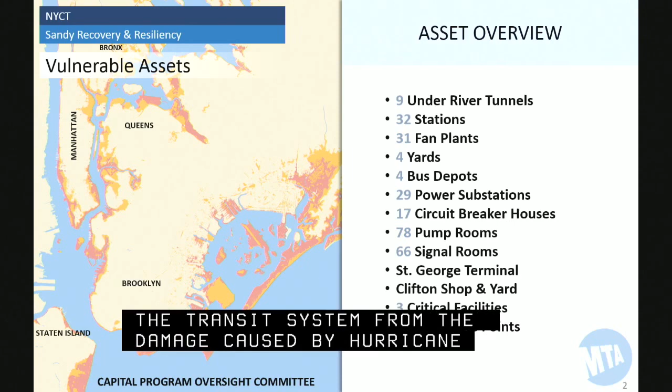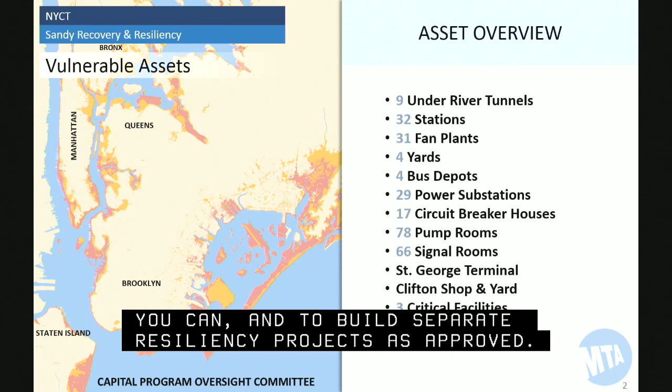This is a substantial effort, but the goal is to recover the system, effect permanent repair, build in resiliency where you can, and build separate resiliency projects as approved. Assisting me in this effort is someone who has just moved on to another position, Alok Saha. He's not here today, but I wanted to acknowledge that he has been the cornerstone of the success of the Sandy program to date.

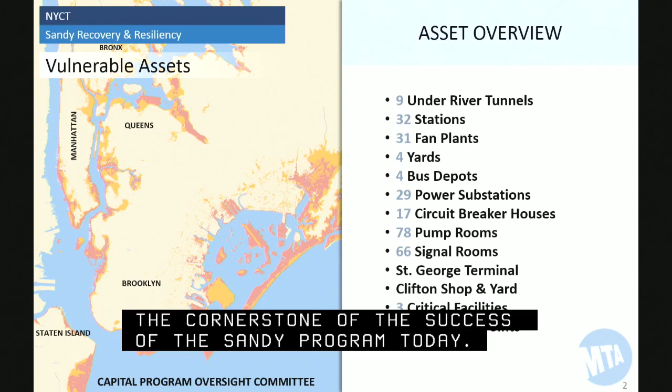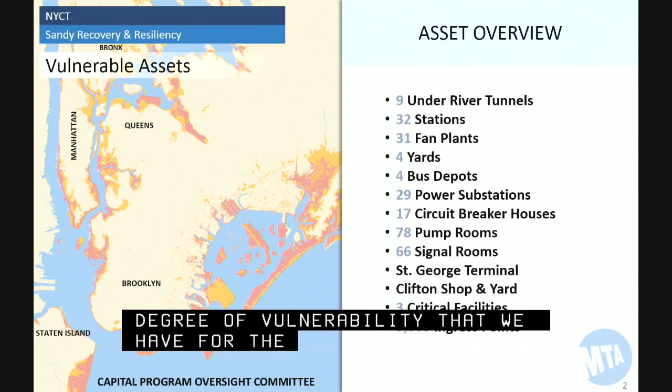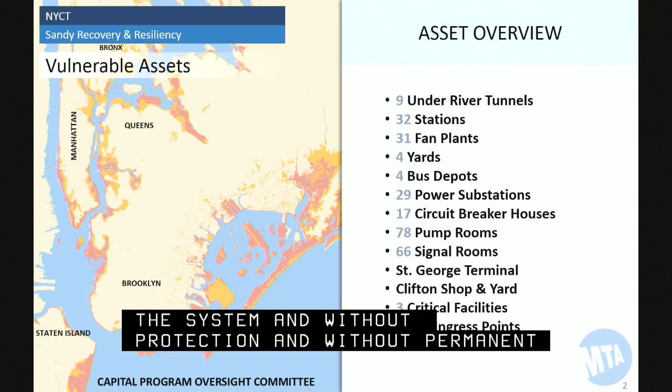The challenge facing transit is significant. A significant part of the transit system, as exemplified here on this map, shows the degree of vulnerability that we have for the assets that support the operations of the railroad. Under-river tunnels, stations, fan plants, circuit breaker houses, substations, all are vulnerable to flooding. All of them are necessary to run the system, and without protection and without permanent repair, the system could be subject to outages.

The goal is to protect the transit system from a Category 2 storm. We are aggressively pursuing that, subject to available dollars, and our needs exceed the dollars available. However, we are working with our funding partners to effect as much repair and resiliency as we can. We have a report that covers 4 categories of work: stations, under-river tunnels, yards, terminals, and shops, as well as resiliency at its core.

Before we get into the 4 aspects of work, I'd like to report on our overall performance to date. Since the inception of this effort, we've awarded $1.5 billion worth of work. So in 2 years, we have awarded $1.5 billion worth of work. We currently have available to us a total funding envelope of some $4.1 billion. So we are well along on the overall funded program for the Sandy Recovery and Resiliency.

I have 2015 commitments of some $250 million of awards and pending awards of some $450 million. Now, the one thing I'm going to take a little engineering liberty on is the Joralemon Tube rehabilitation, which shows up as an award. Actually, we're going to miss it by a couple of days. It's still pending and should be a signed award this week. So I'm going to take a little liberty and say it's awarded.

With regards to planned work, most of what you see on this list is resiliency work, protecting some of the ingress points for water flooding. The non-resiliency work on this list is 148th Street Yard. So $250 million has been awarded so far in 2015, with a balance of $460 million to be awarded as we progress throughout the rest of '15. And into 2016, we have planned $1.5 billion worth of work.

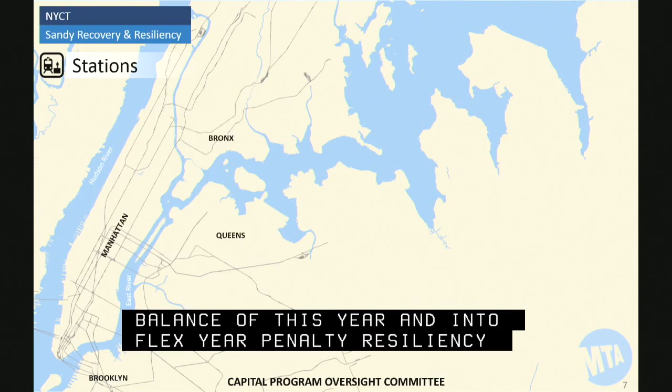With regards to stations, we can move that on. We have 3 stations - 2 in design and 1 awarded. Again, we're going to be talking about South Ferry.

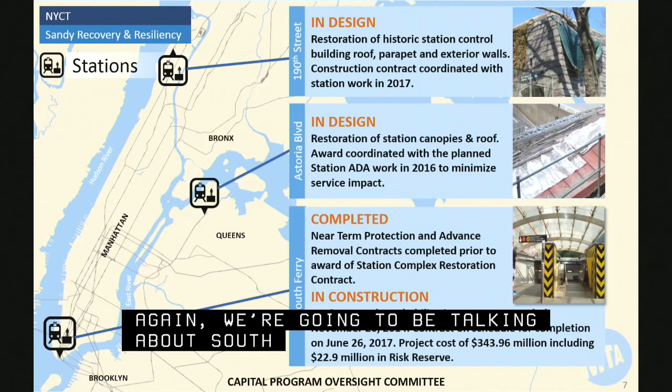That project, a $344 million project, $194 million at bid, was awarded in November of 2014, and it is now July of 2015. The first 6 months of that project were spent on a grout operation, which I'll get into in a minute. But this is a project that's proceeding on schedule, and it will be the full rehabilitation of that station complex.

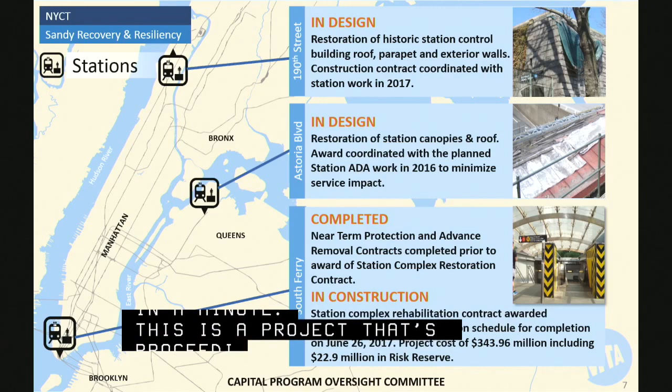The grout operation is a significant operation, and I think I've talked about it at prior CPOC. This is where we are drilling through the structure and performing what is called positive side grouting. When the station opened in 2009, it had a number of persistent leaks.

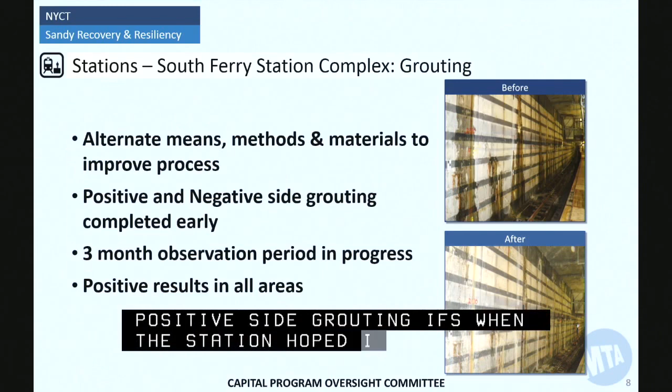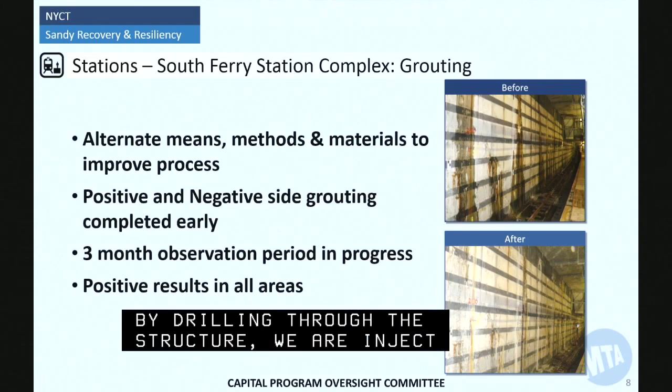The construction that was done at that time had some compromised waterproofing, so that was actually the source of the leaking into the station. By drilling through the structure, we are injecting a new polymer-based grout that travels on the outside of the structure and essentially starts to seal off and reestablish a waterproofing membrane.

Holistically, it is supposed to create a complete membrane. The reality of it is that it creates as much of a membrane as is necessary to stop the water leaking problems. It has been very successful to date.

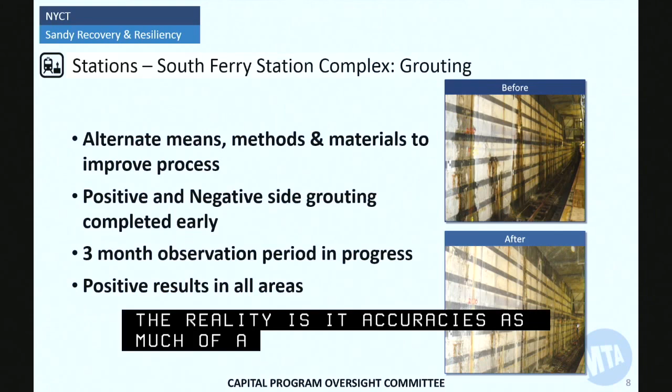The photo in the right-hand corner shows the wall of the station with the finishes removed, and you can see the vertical dark areas where the water has continued to leak into the structure. Then the after photo down below is where the grout has been injected into the structure, and the water leaking has stopped. So we effectively have completed the grout operation.

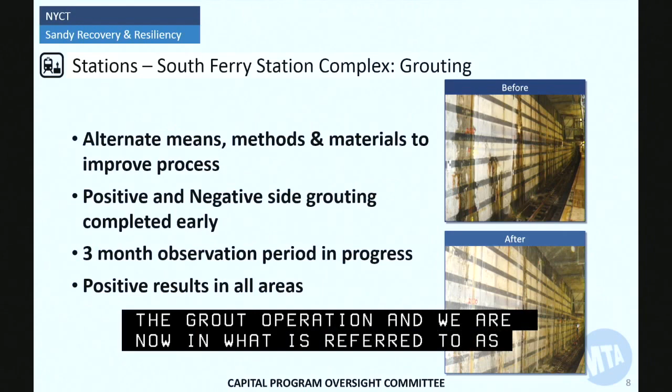We are now in what is referred to as the observation period. This is where we go back in after a couple and make another pass at the grouting if necessary, if a leak continues to persist.

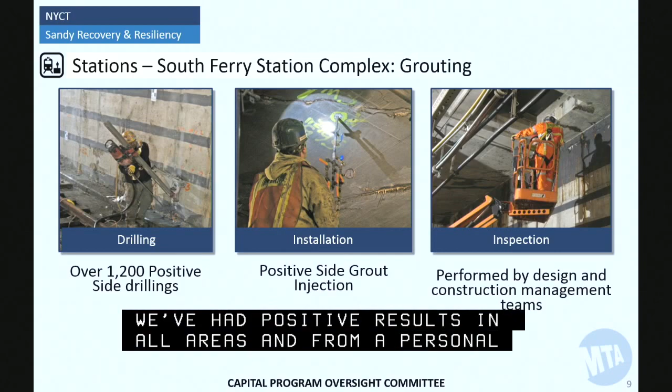We've had positive results in all areas, and from a personal perspective, it's been much more successful than even I had anticipated it would be. I would have been happy with an 80% success rate, and we're well beyond that at this point in time.

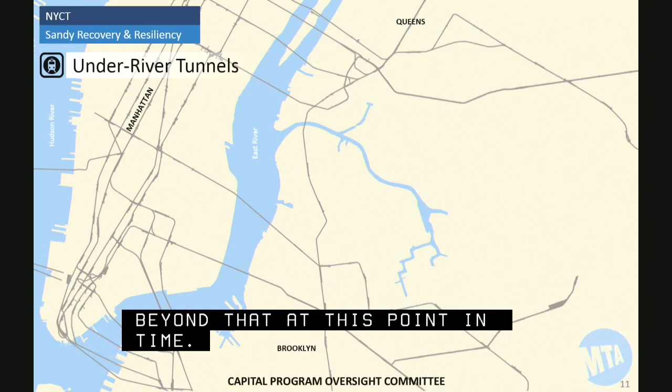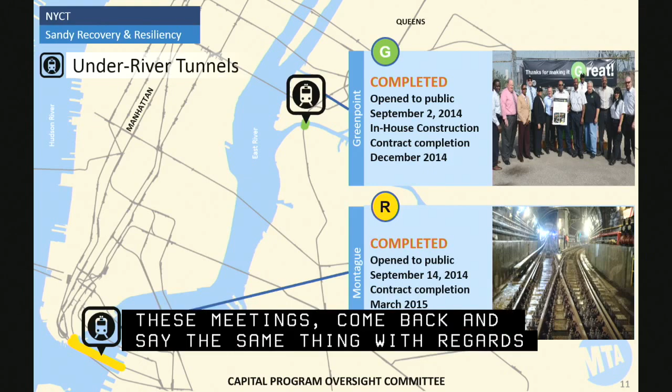We had 9 tunnels damaged in Superstorm Sandy. I'm going to take credit again, because I like to do that at these meetings, and come back and say the same thing with regards to the fact that we completed Greenpoint Tube in September of 2014, work essentially completed by in-house forces, and the overall project was completed in December of 2014.

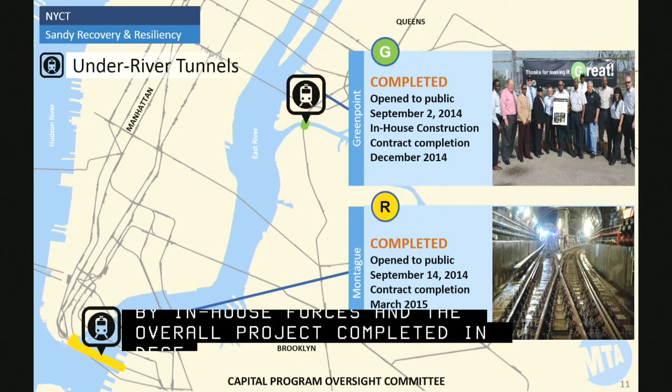Montague, another substantial effort by in-house forces, was completed in September of 2014 with the overall project completion in March of 2015. That sets the stage for our follow-up projects in construction, which is 53rd,

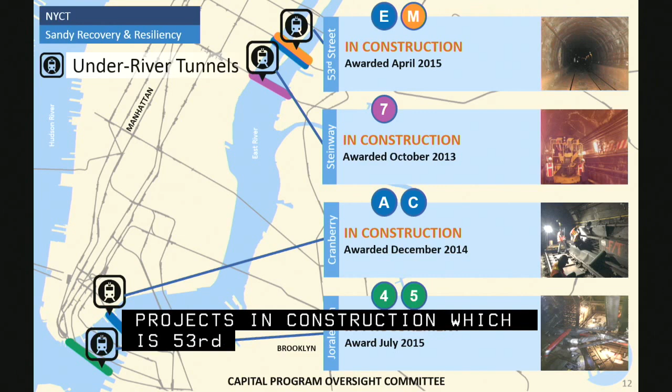Steinway, Cranberry, and Joralemon. All of these projects, again, Joralemon being the one that will be awarded in the next couple of days, will be in construction over the next couple of months.

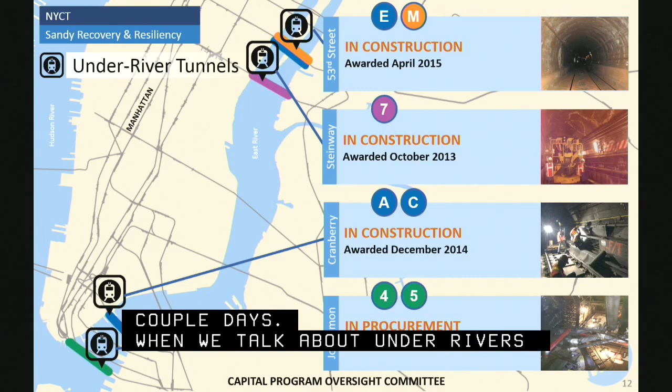Now, when we talk about 4 under-river tubes under construction, there's always a question with regards to service outages. The overall schedule and the outages for these projects is coordinated with the core program, but also then with an eye on the service that we provide.

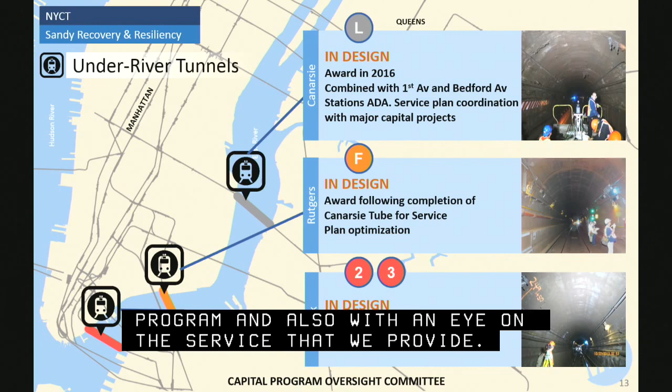Follow-up projects in design are Canarsie, Rutgers, and Clark. These projects will be coming back to the board, CPOC, as we determine the exact time of award and the outages that will be necessary to support.

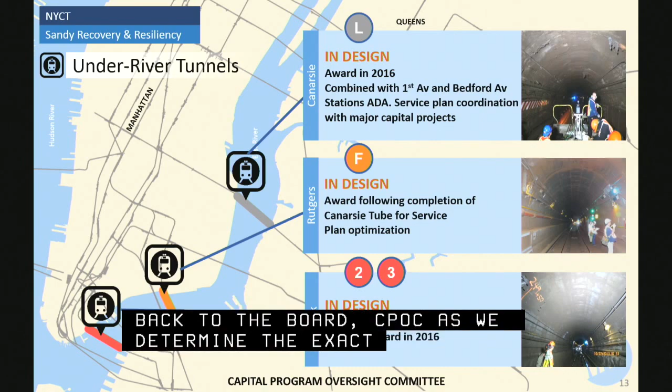Yards, terminals, and shops is one of the categories of work that has an extensive need, and we will see how far the available dollars take us.

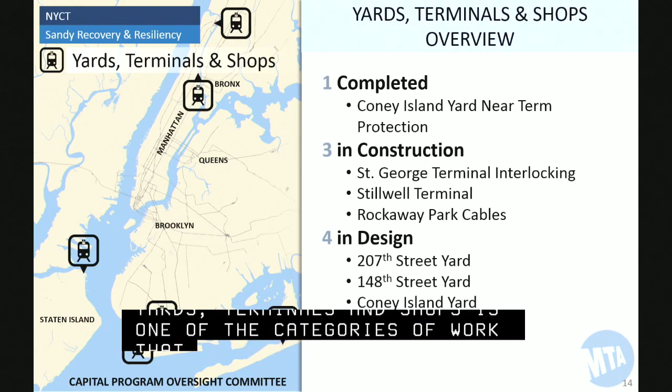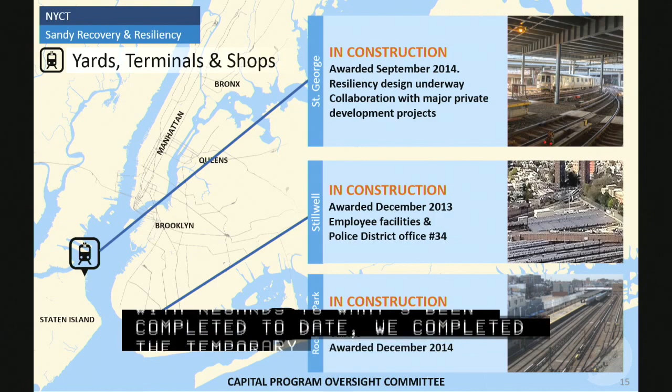With regards to what's been completed to date, we completed the temporary resiliency project out at Coney Island Yard. We have in construction the Stillwell Terminal employee facilities, as well as a cable to deal with the power and communications cables at Rockaway Park Yard.

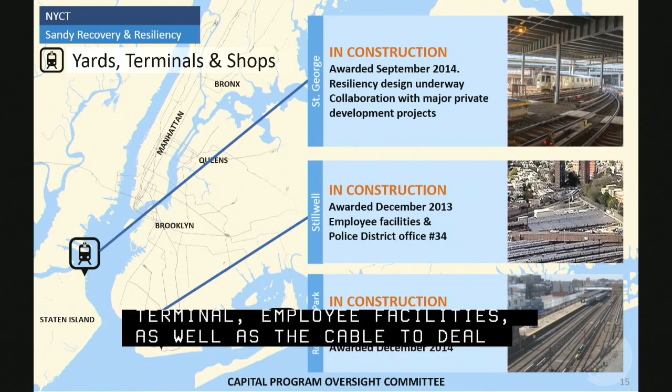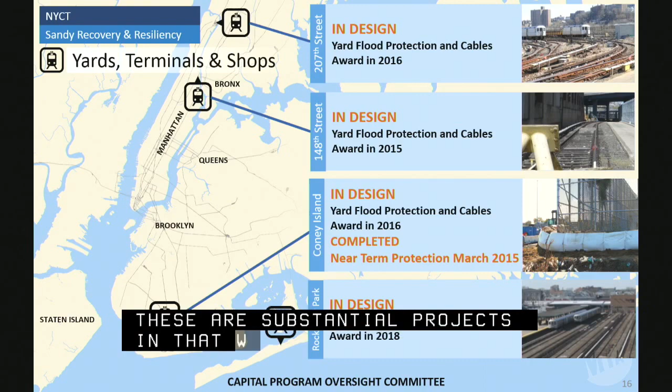In design, though, are 4 major projects: 207th, 148th, Rockaway Park, and Coney Island. These are substantial projects in that we need to build resiliency into the overall facility, while also building in repair to all of the elements that were damaged during Superstorm Sandy.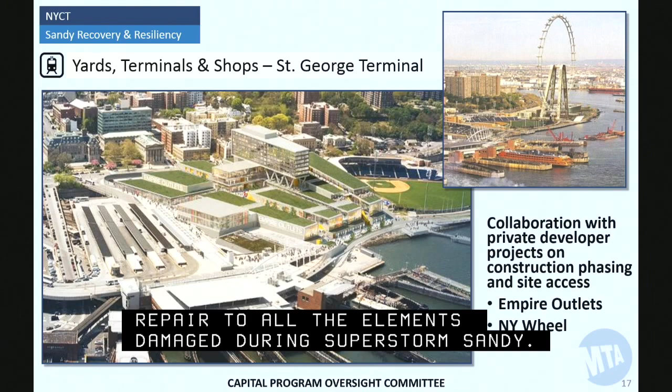The project to focus on in this category of work is the St. George Terminal. This is an artist rendering of what this area will look like shortly. What you see in the middle of the left-hand photo is the bus terminal area.

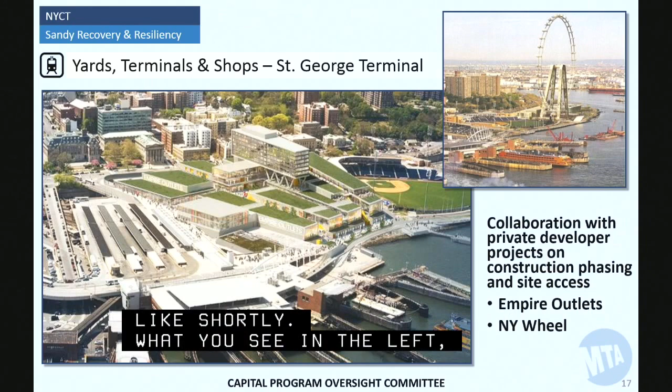Underneath this general area and underneath the green area in the middle is effectively the terminal for the Staten Island Railroad St. George. Off to the right is the ball field, and a little bit further off to the right is the New York Wheel.

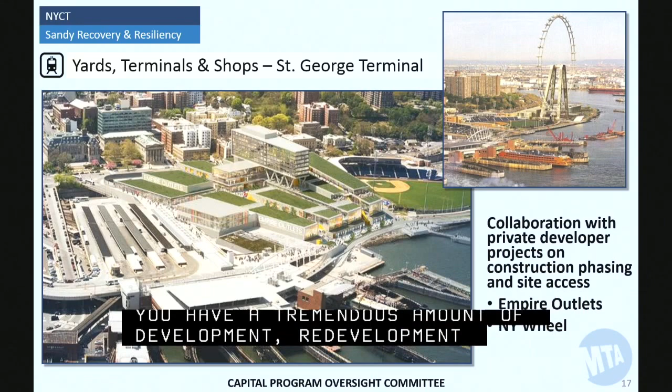You have a tremendous amount of development, redevelopment happening within this very tight site, and so we're advancing this project that was awarded in September 2014 with an overall 30-month duration.

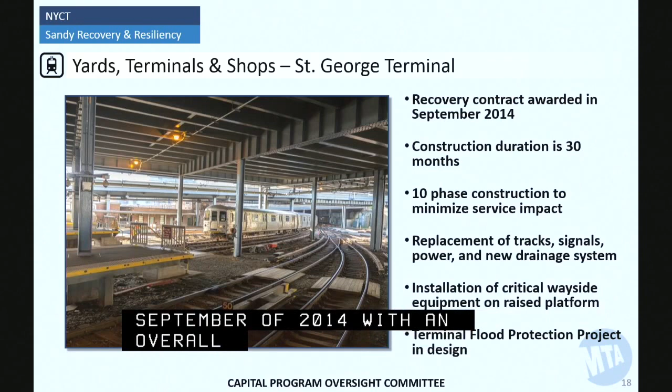It has 10 phases of work, and so what you saw beneath that rendering is essentially the rebuilding of this complete facility, the terminal for Staten Island Railroad at St. George.

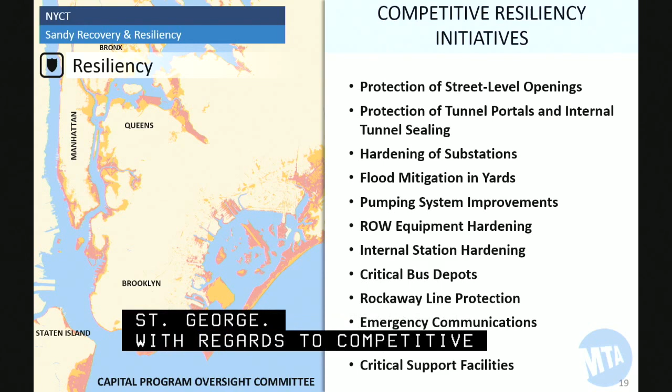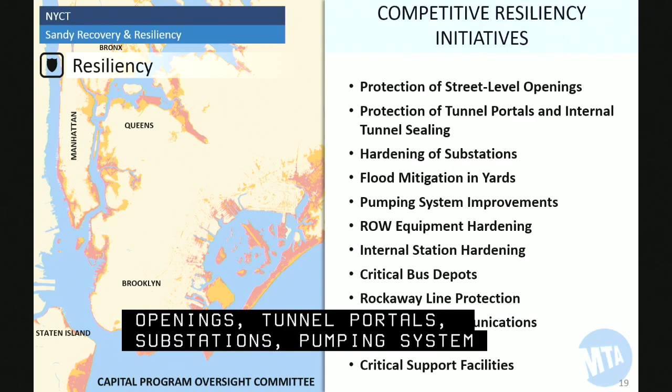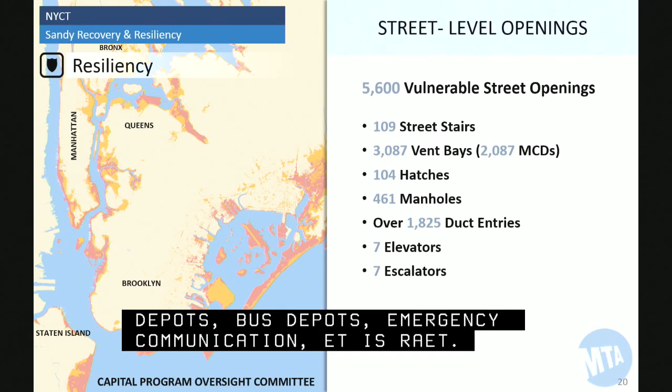Furthermore, with regards to just local resiliency, we have a number of vulnerabilities through street-level openings: 5,600 total street-level openings that are potentially flood ingress points, 109 street stairs, 3,000 vent bays—that's about 10%, a little less than 10% of the total vent bay population—104 hatches, 460 manholes, 7 elevators, 7 escalators.

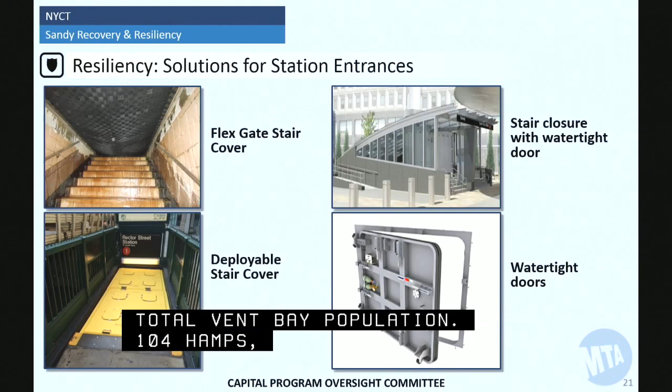To bring about solutions to these, we've had to work with numerous firms to develop site-specific solutions.

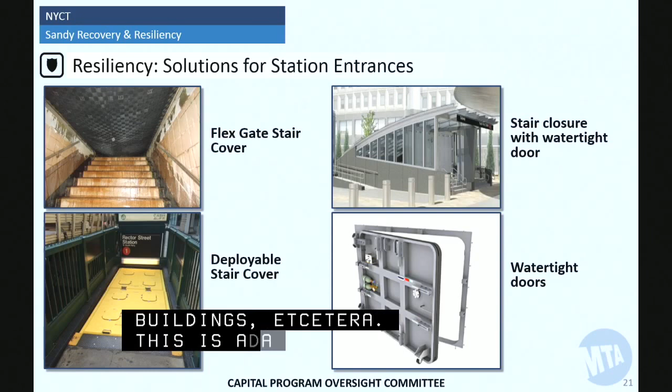On the upper left-hand corner, you actually see a flexible stair gate closure. This is a device developed solely for transit that is now being marketed to other agencies, other firms, other buildings, etc. This is adaptive reuse of space technology that allows us to store on-site, at the entrance to the station, a deployable stair cover that gets pulled out, cinched down, tightened up, and provides full protection of that street-level opening from flooding.

The lower left-hand corner is a different type of hardening—a hardened steel hardening of the staircase. This is something that would have to be deployed to the site from a storage location and installed in place in advance of the storm.

Upper right-hand corner is building in resiliency within the new stair entrance canopy at South Ferry. This is where we're rebuilding the entrance with a hardened, structurally sufficient wall, knee wall, and then a hardened glass glazing. Built within the ceiling of that staircase will be a pull-down stair closure that will allow that stair to be closed should that type of event develop.

We'll also be working with watertight doors.

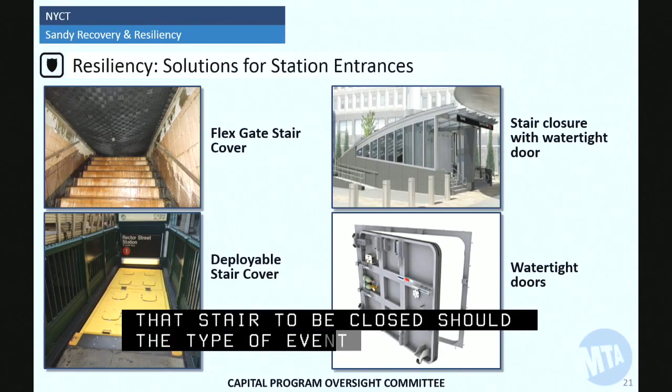Other resiliency solutions that we're utilizing are resiliency stair covers, and in the upper left-hand corner, deployable vent covers. This is just a slightly better version of plywood that would have been used should we have had an event.

Upper right-hand corner, we have numerous hatches—equipment hatches, personnel hatches, emergency exit hatches—that all have to be made watertight. So we've worked with manufacturers to develop them, and now we're starting to install them.

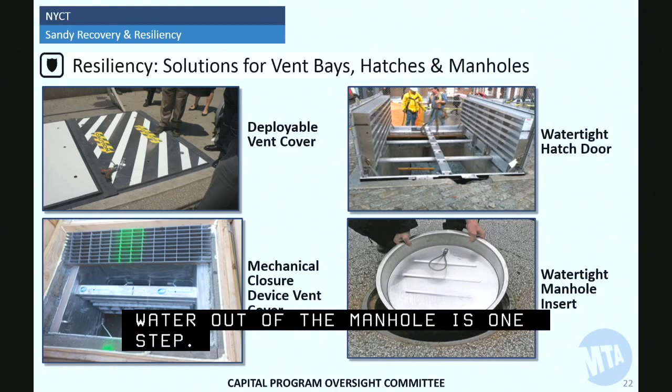Similarly, for manholes, we've developed watertight manhole closure inserts. However, keeping the water out of the manhole is one step. Assuming that insert fails, we also then have to protect the manhole-to-manhole duct bank runs at either end in order to provide a layer of protection against flooding and water infiltration to the system.

With regards to other types of elements, we have elevators that need to have hardened glazing, and we're doing so in the 2 locations that are necessary. We'll be providing a stop log closure at these locations, again, to be deployed in the event of a Sandy-type event.

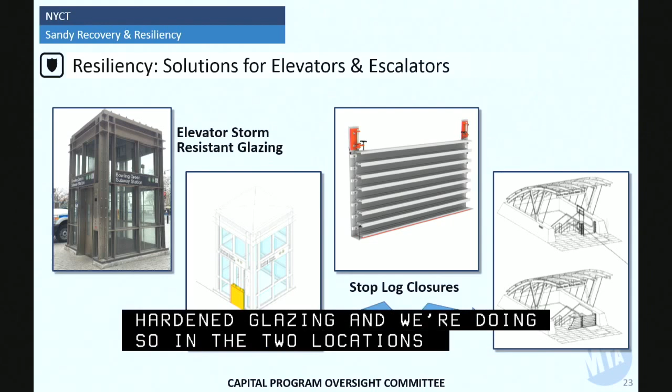And finally, I have a tunnel portal flood protection, a couple of photos to show. In this case, this manufacturer, who works for Department of Defense and NASA, has been working with us to develop a flexible closure device that would be left on site, left at the location, and deployed as necessary should there be a threat of flooding.

In this case, this manufacturer built a full-size mock-up of a tunnel portal. They then deployed, in the middle picture, their flexible closure device. We flooded that to a height of 14 feet and observed a very, very acceptable rate of leakage—very minor relative to what it could be in the event of a storm. What you see in the right-hand photo is the gate rolled up into its open position.

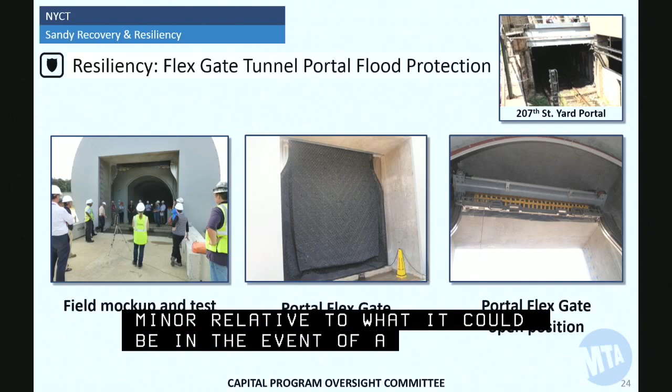So overall, we're continuing to advance the overall Sandy program.

I wanted to thank Fred Smith for his guidance as Senior Vice President. As was announced earlier, or acknowledged earlier, Fred is leaving us. I hate to see him leave because he provided a level of protection that saved me from Sandy-type events. Anyway, thank you all.

I should have said at the front of the meeting, Fred is retiring after a very long career, both at Long Island Railroad and here. How many years, Fred?

I believe it's in his family blood, because I believe your grandfather or father was at the Long Island Railroad. Between Dad and I, we have worked here within the MTA family for 86 out of the last 97 years.

Fred will take a wealth of experience with him, but he's left some able people behind him, and John O'Grady is one. I'd like to thank you. I've worked with Fred three different times, New York City Transit, then over at Long Island Railroad and back when I was back at New York City Transit. So he's had a very long and established career.

Any questions for John?

One of the more aggressive things we need to do is there's still some money out there that needs to be competed for on the resiliency side. Unfortunately I did use the word competitive because we do have to compete for it. It's not going to come to us just because we're the big dog in town. So we need to be able to do that in a very aggressive way and get that money because there's still a lot of work to be done.

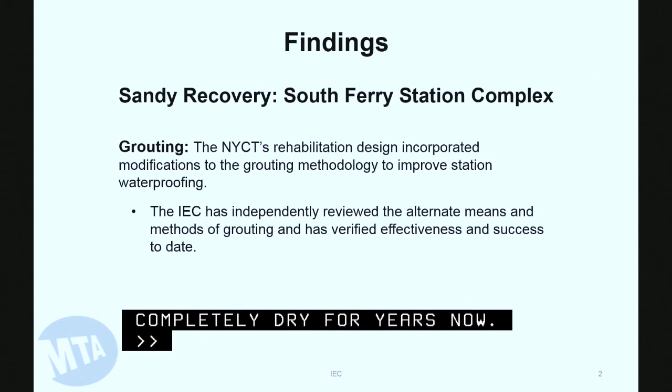Hindsight being 2020, maybe knowing what we know now, if we could go back and do the original design on South Ferry and the construction, we could have used more aggressive methods to capture water and pump it out. Maybe that's a lesson learned going forward, but there was really no way to go back and recapture that once the construction was done.

I can tell you I was surprised. I know John said he was surprised too, but so far it's been very effective, because prior to this it almost used to rain down there at certain times.

There are two sides to this grouting. One is the positive side grouting, which wasn't used before—that's drilling through the membrane. The second is the actual grout being used, which has the viscosity of water, and it goes through every crack and everywhere. Both techniques weren't used the first time around, and it's been shown to be quite successful.

So it has the viscosity of water until it hardens, and then it becomes much more of a barrier. You control where you want it to harden by using additives.

Okay, thank you. The next presentation is on communication-based train control, and that'll be given by Nitish Patel.

My name is Nitish Patel, and today I'll brief you on the results of the risk assessment workshop we conducted for the CBTC Queens Boulevard Line project.

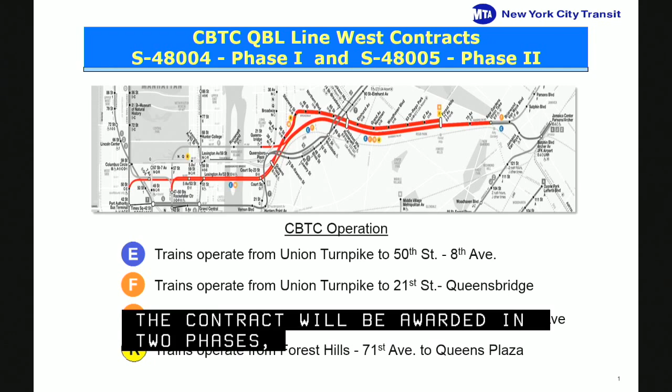This CBTC contract will be awarded in two phases: design furnish phase 1 and installation phase, and I'll give more detail in the next slide. This corridor operates 4 lines—E, F, M, and R—and shown in this slide are the limits within each of the 4 lines where CBTC will be deployed.

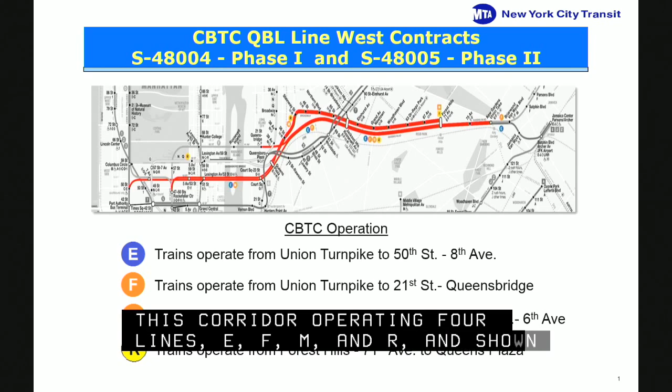CBTC Queens Boulevard Line West Phase 1 contract S48004 will design, furnish, test, and place in service the CBTC system, including the data communication and automatic train supervisory system. The Phase 1 contract will be awarded to Thales and Siemens.

Phase 2 contract S48005 will install the CBTC data communication system and automatic train supervisory system, plus design, furnish, install, test, and place in service the auxiliary wayside signaling system. It will also rehab the existing wayside facility to support the CBTC. This contract is scheduled to be awarded next year upon funding availability of the 15-19 capital program.

The base budget for both phases is $548 million, and the combined total schedule for both phases is 75 months. We did have a risk assessment workshop in April 2015.

The risk-informed budget for an 80% confidence level, unmitigated, is $571 million, and mitigated is $564 million. But as we know more information, and we are now in July with additional information, we feel comfortable that the base budget can be accepted as the mitigated budget. For the schedule, the base schedule is 75 months, mitigated is 74 months, but we will keep 75 months since we don't know at this time when we're going to award the installation contract.

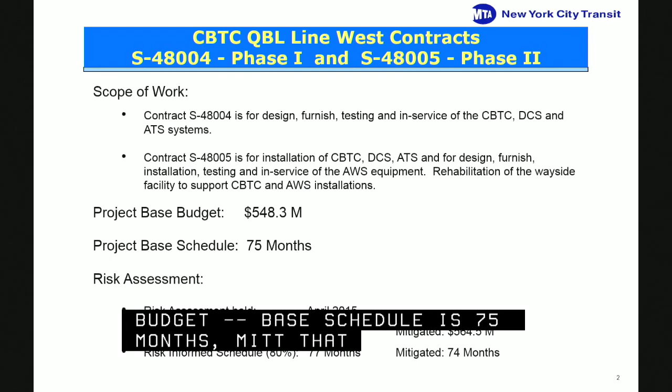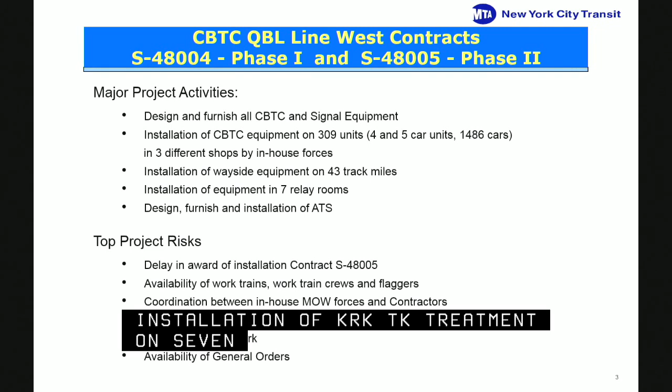I will tell you the major project activities, and then run through the major project risks and how we're mitigating those. The major activities are: design and furnish all the CBTC and signal equipment; installation of CBTC equipment on 309, 4 and 5 car units at Coney Island, Jamaica, and East New York shop by in-house people; installation of CBTC and wayside equipment on 43 track miles; installation of CBTC equipment on 7 relay rooms; and design, furnish, and installation of an automatic train supervisory system, which will be expandable to ensure operational consistency when future CBTC lines are added.

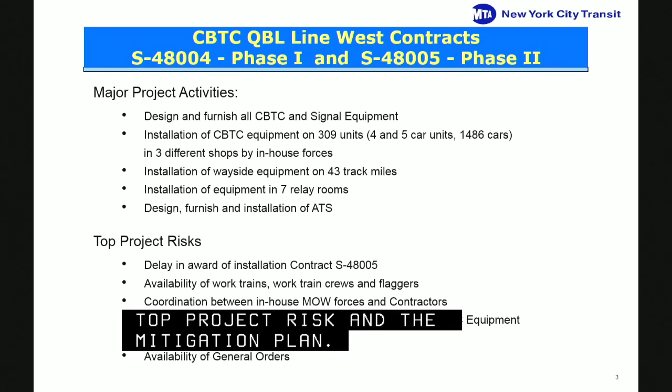Next, I'll discuss the top project risks and their mitigation plans. Availability of the 2015-19 budget could cause a delay in the award of installation contract 48005, and any delay will be mitigated by modifying the installation contract requirements.

Availability of work train crews and flaggers will be mitigated by prioritizing and proper coordination. The risk of coordination between in-house forces, other contractors, and the track department will be mitigated through proper coordination between the car shop, operation planning, and RTO, and continuous coordination with the track department.

And this concludes my presentation. Any questions? Mr. Albert, you have some questions?

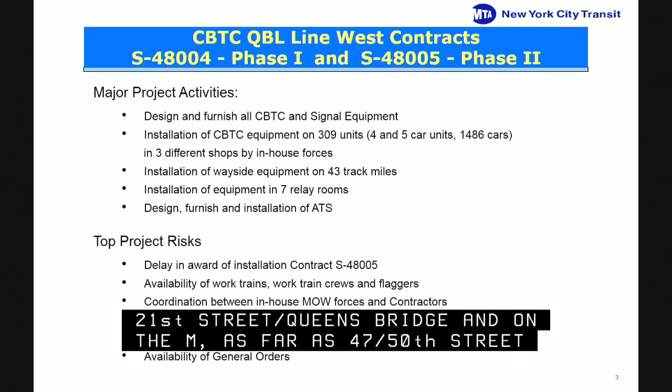In one of the first slides where you give the geographic limits of the CBTC installation, what happens if you have, in the case of the F, CBTC as far west as 21st Street, Queensbridge, and on the M as far as 47th, 50th Street, Rockefeller Center, and you deposit trains from both lines onto the 6th Avenue line, which does not have CBTC south of 47th, 50th Street? You fit in extra trains thanks to the CBTC. I assume you're not going to turn it on until the whole line is complete. Is that the way it works?

Well, then how do you deliver it and put it in a place that doesn't have CBTC and manage it? You control the number of trains that go on a track by scheduling, and you can't put more trains on the track than what the signal system would enable. But you have to install the CBTC in phases anyway. But you don't get the benefit until the entire line is CBTC, correct?

No, we do get benefits. Our program going forward is a comprehensive strategy, which involves not just our traditional modernization of the signal program, but our entire fleet purchases going forward, and now the overlay of CBTC. We've spent the last couple of years putting all three of those together to make sure we had a comprehensive strategy. One key benefit of CBTC is the safety provisions. We've talked about this in previous meetings, where civil speed protection can be provided initially, once you equip the trains, which is why we changed our strategy to include the fleet as part of it. You saw on the slide that almost 1,500 cars will be equipped with CBTC.

Having the database loaded will provide civil speed protection in those areas where we activate it, so we can immediately reap the safety benefits even though we may not have the capacity improvements right away. In the areas where we do deploy it, you will have those protections. If the train travels outside of that, it'll still be under the normal wayside protection. But this will enable us to maximize those benefits as we progress through the entire universe of lines.

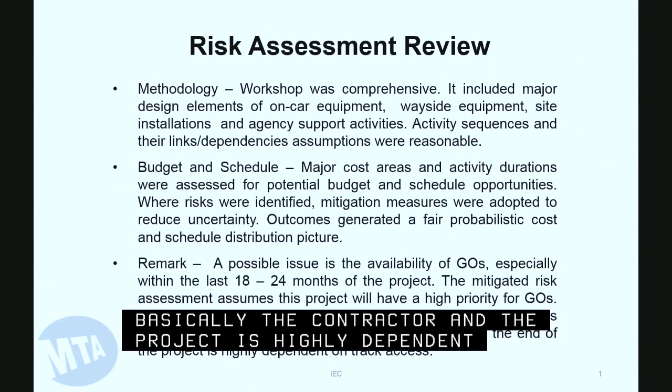So if I can just follow up a little bit, Andrew, this morning at TA Committee you had asked about this also, and the importance of an integrated work schedule. The 10 to 14 capital program was built around the signals program because it involved so many outages due to the long wayside areas where we install equipment.

Going forward in the 15 to 19 program, what has been proposed is again based around signals and Sandy together. We've had to make some modifications with both, as far as what John presented, where some of the tunnels we had laid out, we originally were going to try to do earlier. We've now moved them around in order to maximize the signals program and the Sandy program, moving some things out to later years and bringing some things in to accomplish that. But all the other projects within the 15 to 19 will be based around signals and Sandy.

The challenge going forward is picking up the pace on CBTC, which is what we need to do, and balancing that against how many outages we're going to have. There'll be some healthy tension discussions with stakeholders on that.

Next presentation is the update on minority, women, and disadvantaged business participation. That's Michael Garner and Gwen Harleston.

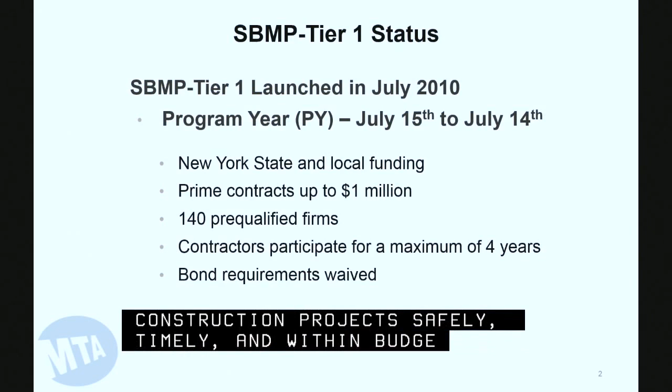I'm going to give you an update on all 3 elements of the development program, starting with Tier 1. This year marks the 5th year since the legislation was created in July of 2010. We report on a program year, which runs from the middle of July, July 15th, to July 14th. The Tier 1 program consists of New York State and local funding, with prime contracts up to $1 million.

We currently have 140 pre-qualified firms in the program. These firms can participate for a maximum of 4 years, and we've recently graduated out firms from the program who have been in for that period of time. As a reminder, this particular program, Tier 1, does not require a bond from the participants.

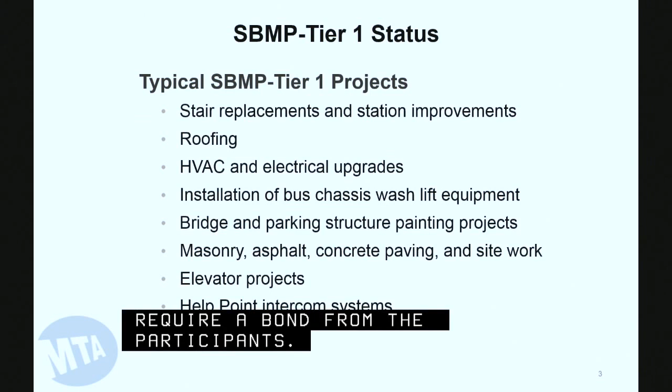The next slide shows typical projects that we've been doing in the Tier 1. Of these projects, stair replacements and Help Point Intercom are the most common programs that we're undertaking.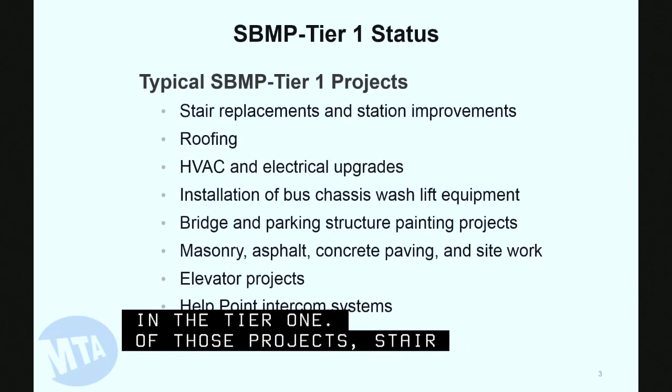With regards to the actual awards in the first 5 years, we had 171 projects. Our goal was $92 million, and we've actually awarded $107 million, and that was awarded to 112 firms.

For the upcoming year, program year 16, the award goal is $28 million, and that will be dependent upon the funding of the capital program so that we can do the construction.

With regards to achievements in Tier 1, we've received 508 applications over the 5-year period. We've pre-qualified 255 firms over that same time. 112 firms have been awarded projects since inception, and of those 112, 45 have received 2 or more projects. There are also several participants in the program that have obtained MTA contracts outside of the development program.

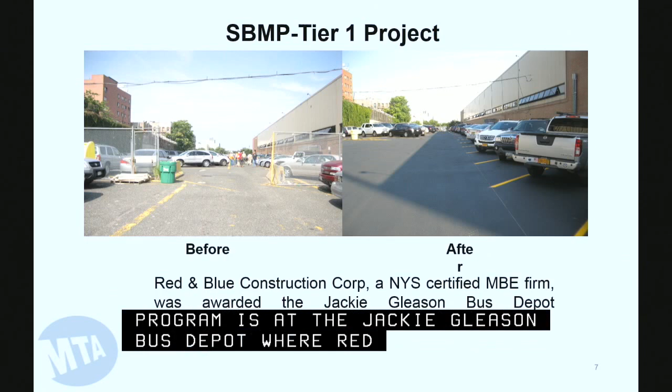One example of a successful program is at the Jackie Gleason Bus Depot, where Red and Blue Construction, a New York State certified MBE firm, did an entrance and parking lot repavement project, where you see the before and after pictures up above, and that project value was $873,000.

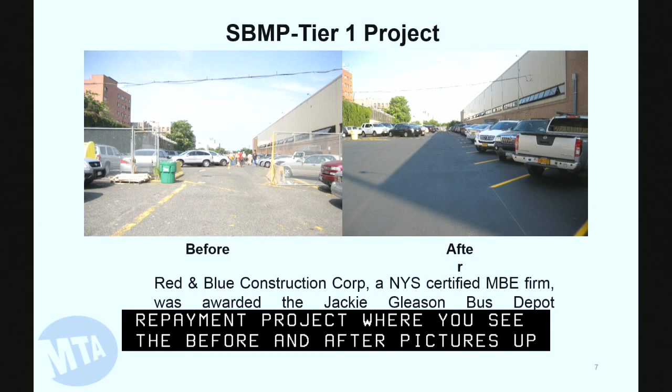Moving to Tier 2, that was launched in July of last year. In this program, they're state-funded prime contracts in the range of $1 million to $3 million. Again, it's participation up to 4 years. In the Tier 2 program, performance and payment bonds are required. We currently have 33 pre-qualified firms, all of which were graduates of Tier 1, which is a requirement for the Tier 2 program.

With regards to results in our first year, we had a goal of $15 million. We exceeded that at $24 million. There were 12 projects that were awarded to 11 firms. For next year, our goal is $26 million.

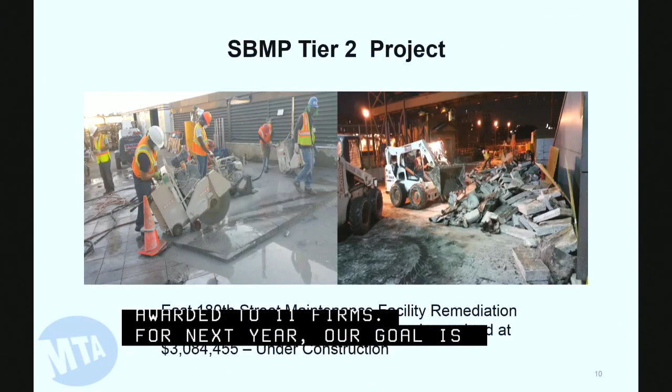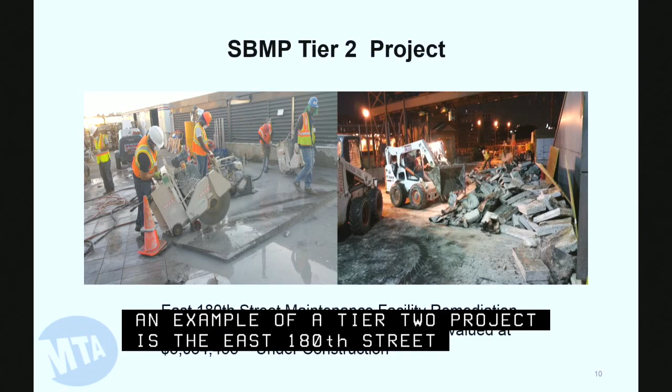An example of a Tier 2 project is the East 180th Street Maintenance Facility remediation project. That was awarded to SAI Services, and the value was just above $3 million, and it's currently under construction.

For the federal program, which was launched in 2012, we have federally funded programs up to $3 million with a maximum participation of 3 years in the program. Payment and performance bonds are required. There are 34 pre-qualified firms, 21 of whom came from the Tier 1 program. We've had 16 firms that have been awarded projects since inception, and 10 of those 16 firms were awarded 2 or more projects.

The results for the first 2 years of the program: there were 30 projects awarded to 16 firms. The goal was $30 million. We actually awarded double that, at $60 million. Our goal for next year is $26 million.

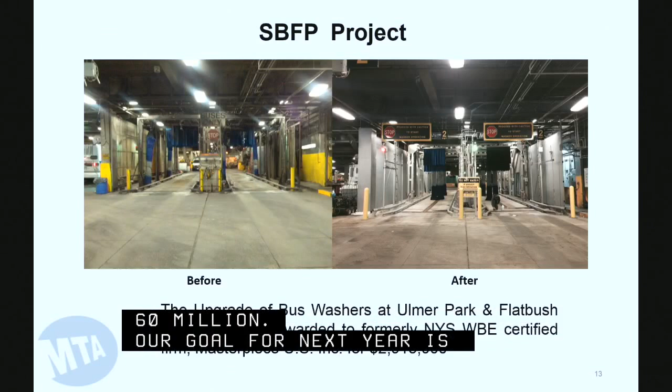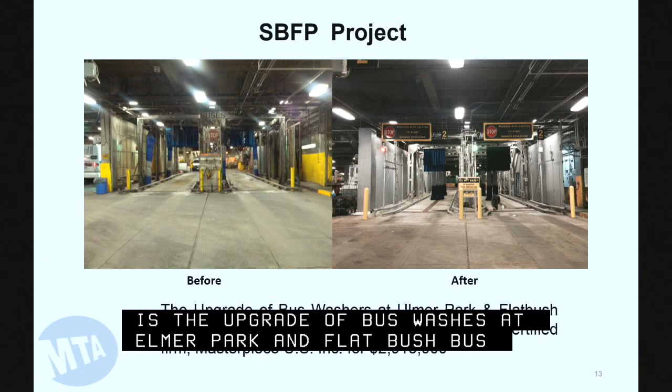An example of a federal program is the upgrade of bus washers at Ulmer Park and Flatbush Bus Depot. That went to a New York State MBE or WBE certified firm, formerly certified. They've actually grown out of the program -- their revenues are too high to stay in the program -- and that company's name is Masterpiece, and that contract was worth $2.9 million.

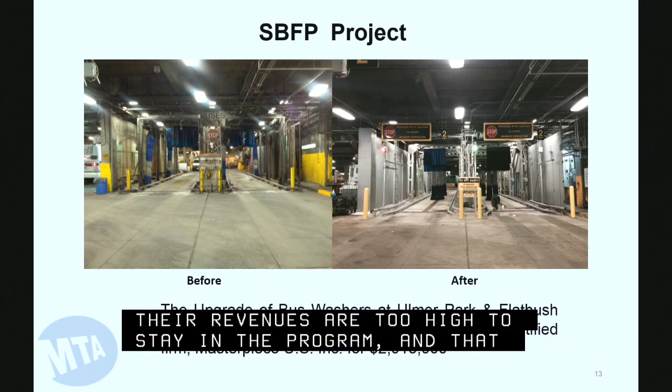The next slide shows you some of the competitive bidding that was done in all 3 programs. The takeaway from this is that in the aggregate, the bids do fall in line with the engineer's estimates. Some are high, some are low, but on aggregate, we are right in line with where the engineers have estimated the projects.

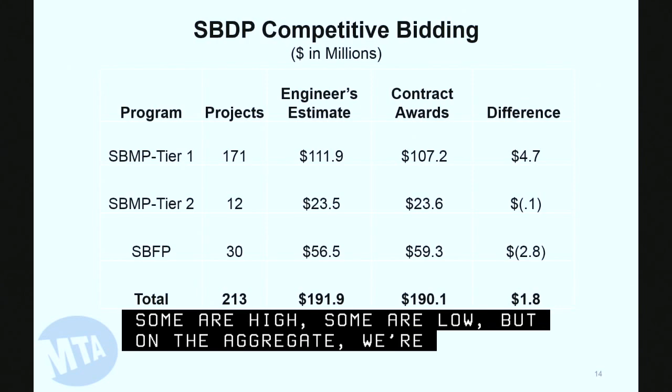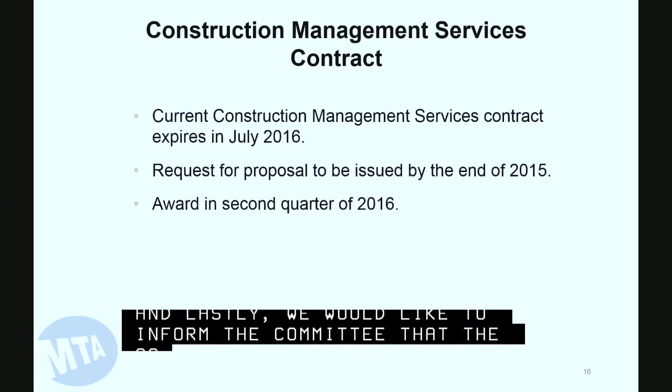Lastly, we would like to inform the committee that the construction management services contract currently with TDX Construction expires in July of next year. So we'll be going out with a request for proposal for a new contract at the end of this year, and the expectation is to award in the second quarter of 2016.

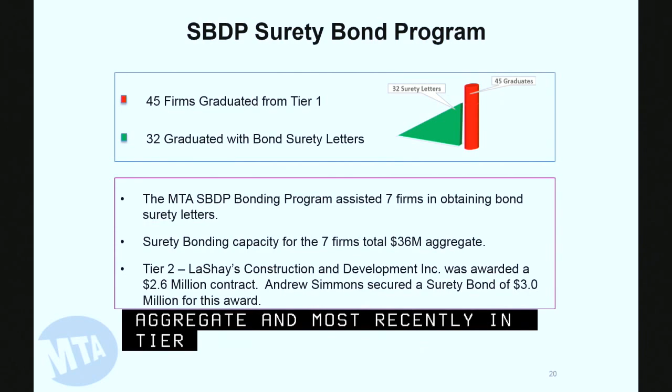Surety Bond Program: we had 45 firms that graduated from Tier 1, and 32 of those firms graduated with bond surety letters. The MTA bond program assisted 7 firms in obtaining bond surety letters, and those 7 firms had total bonding capacity of $36 million in aggregate. Most recently, in our Tier 2, LaShay's Construction and Development Inc. was awarded a $2.6 million contract, and the owner was able to secure a surety bond of $3 million.